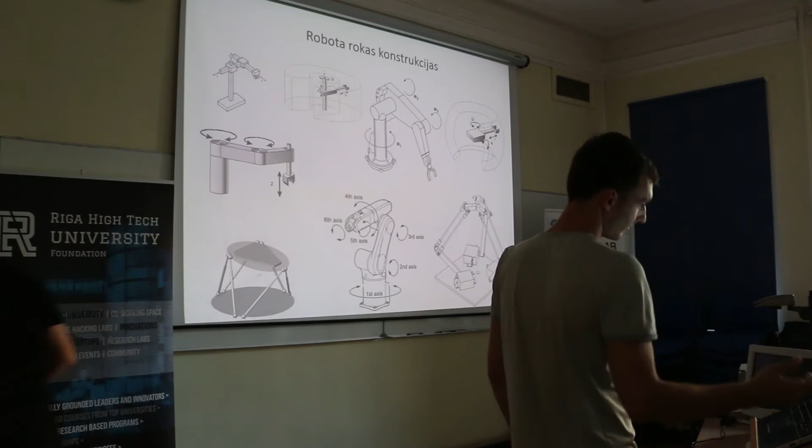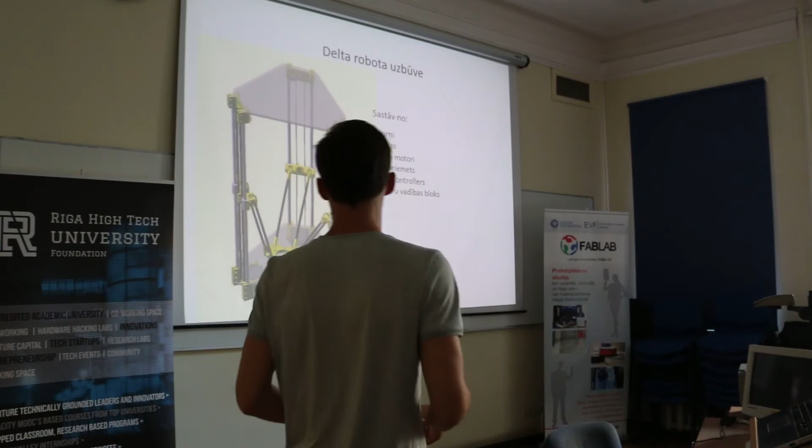Basically my work is a 3D printer, but I built only the moving parts, so I can arrange that with my school, so it could be a robot arm. Yeah, it's part of my master's. So I built a Delta robot printer. This is the picture where you can see 3 towers, 3 arms, which connect in the middle, where you can put your element, extruder. And under all of that, there is a microcontroller and a motor.

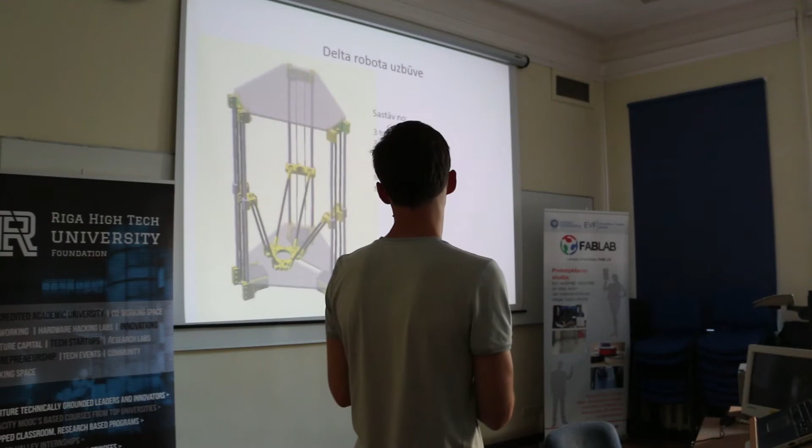Can you tell exactly what this thing does in this 3D printer? How it works? For example, what is an actuator or what is a microcontroller? It's gonna be long. I want to keep it as short as possible. If someone has prepared a question, then you can go and talk to Christos. Yes, there is a wooden tower, it's made by me, and you can ask questions later if you want. Okay, I will do that.

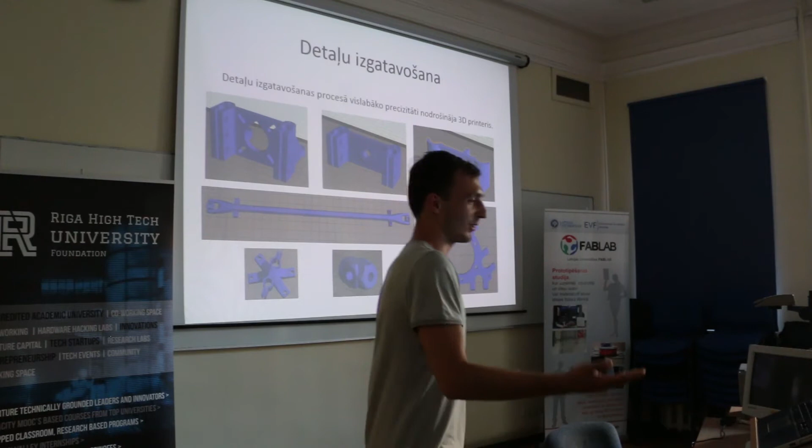For my old teachers, it was a very good presentation, but I think for you it's not so interesting because there are all the parts. You designed it on your own, or is it downloaded? Downloaded. Everything is for free. If you look, you can find it. And there is how all that works. I think it's too complex for me right now to talk about it in English. But if you want, we can talk in that room.

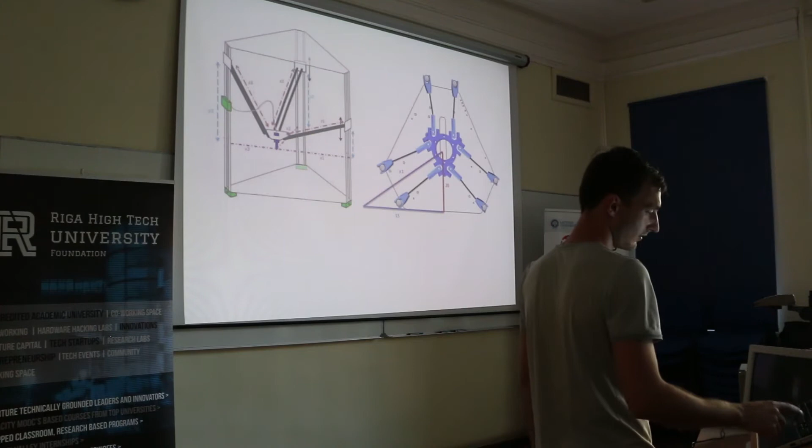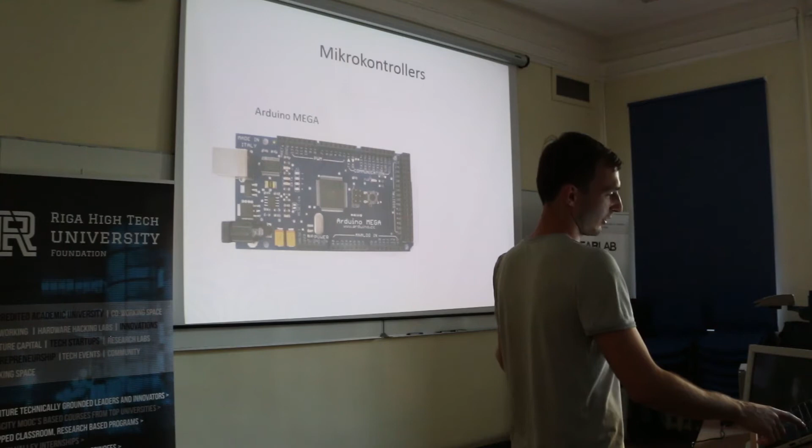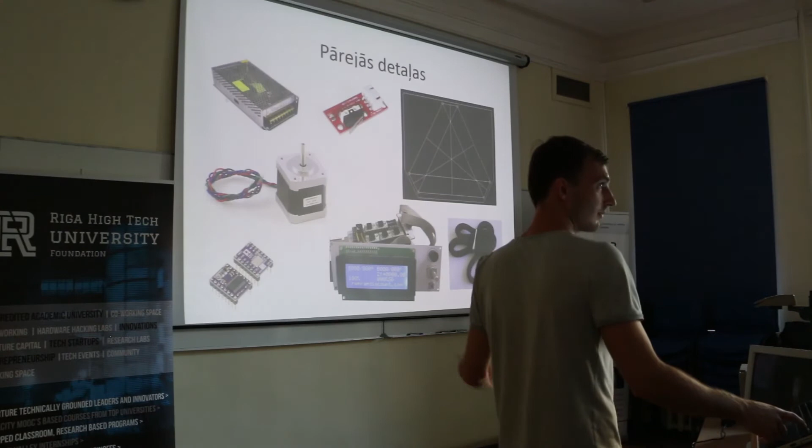Microcontroller: Arduino Mega, the biggest, strongest microcontroller from Arduino. Then there is a RAMPS, which is basically designed for RepRap, and only the software is changed to work with the 3 towers. So there is a little difference between RepRap and Delta robot. So, there are all the parts. Any questions about those? What is it? No, I don't know. We can talk about it there.

Where did you make those parts? In the Fab Lab, yeah. And before that, I didn't know that in Latvia there is a 3D printer master. I didn't know about that, and then Krish told me, and it was a big surprise, because they use the same mechanical construction as I was trying to do.

So, you said the word RepRap. What does it mean? Yes, it's a printer. I don't know what those acronyms mean, but RepRap means a machine that is capable of replicating itself. And that's the goal of the RepRap project, building machines that can reproduce themselves, theoretically. Practically it means right now that we can print out plastic parts on the printer and assemble a new printer. And of course it needs some motors like stepper motors. That's the meaning of the word RepRap.

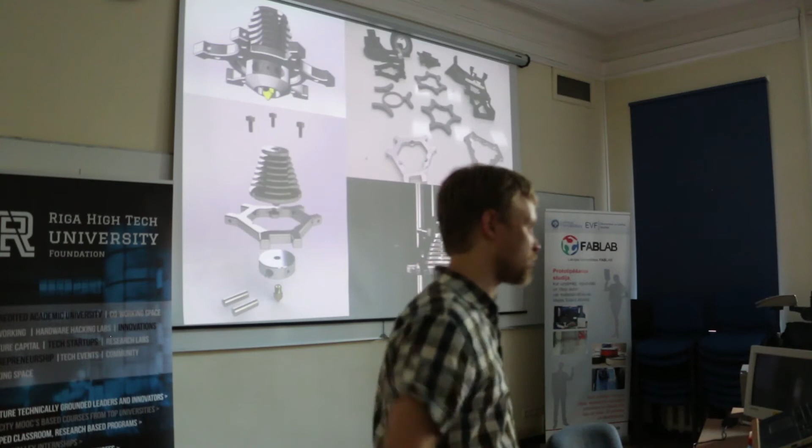And then we started dreaming about the next version of our product and prototyping that. And here we go. For example, printhead. We are not building Chinese components and putting them together. We want to build a beautiful machine and an original printer, so a lot of it is built in Latvia, made in Latvia. Over here, some companies help us with metalworking and electronics, and now also with software.

So in this case, 3D printing helps us to prototype the metal parts in the first place, and they are printed on our printers. This is ABS plastic, and it allows the parts to be tested. We can go through lots of iterations. We make some models, change it, print it out, and some components of the printers have been through 20 iterations, maybe more, till we find one that suits us, and we can test them out. And the parts are sturdy enough. They can be used also for limited volume production.

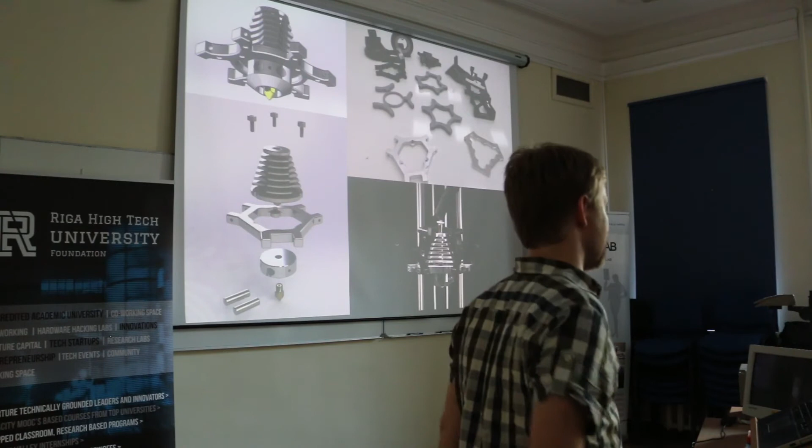And that's essentially the key to getting the product to work as it should, because if you have it only in 3D, you never know how the material works out in real life. So the essence of prototyping is that you can test it out, show other stakeholders, and basically touch a new version in very short time and very, very cheaply. Basically at the cost of the plastic filament, if you have the printer and the ability to model it in some 3D software. So that's the final product for the previous edition. Now it's again undergoing prototyping, and so it just iterates forward.

Here is the result of the previous prototyping work in an exhibition, and again prototyping a different component of the printer. That's the linear guide system that you also saw in the previous presentation called Delta, but we started out with metal rods, calibrated rods from a very good supplier. And found out experimentally that all the components have to be of very, very high tolerances mechanically. So we have now moved on to a linear guide system that gives better precision, but these parts are how we get there. There's lots of experimentation, lots of back and forth, lots of consultations with different experts.

And not all of the prototyping happens on 3D printing, and as you see in the bottom pictures, we have done some prototyping on aluminum as well. So that's just not the way to do it. It's very expensive to have these CNC parts cut, but sometimes you just don't have the time to print something, or your filament has run out, so we did a bit of that as well.

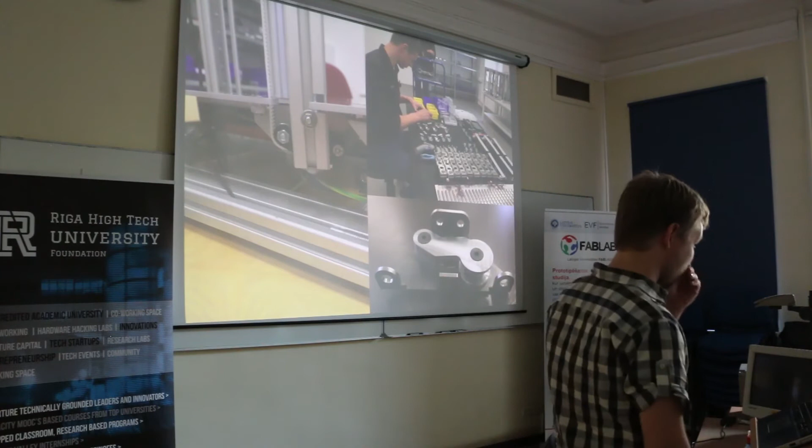And also, again, here you see some part that's printed out, used in a real life situation, the tensioner of the belt, just to check how it works before it's sent to CNC machining, and that's the final beautiful part, and that goes into our production.

So this is a real life story of how the prototyping process looks. Just one printer for a person is never enough. It's not that fast yet, so you can churn out far more models than you can print on one printer. So it's nice to have a number of them, and we are of course a bit privileged in that regard, but still.

And the next story, I will maybe ask Juris to tell it. Another product that's also gone through this prototyping and now is being shown to big investment stakeholders to evaluate it. And so, Juris.

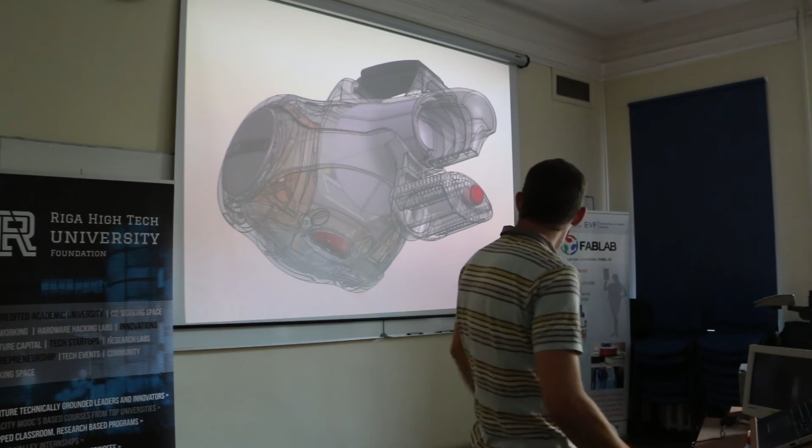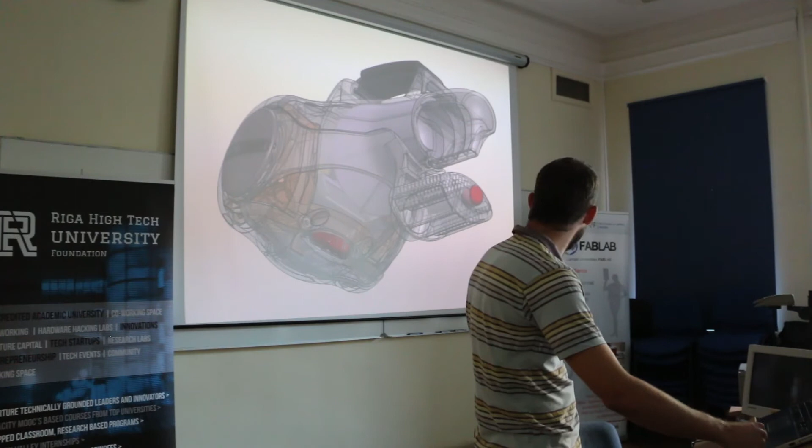And then we had a crisis, and I had time to learn CAD, to search what we have not in the Baltics, and we have not till this moment infrastructure for making things and infrastructure for thinking about making things. That is very bad, that we're talking about innovations, about how to learn to swim, but we have no pool, we have no idea how to go to the ocean.

And here is printed parts. This is in my home. I bought some MakerBot. I really bought what is the most common apparatus in the world. I have no money to pay 2,000 euros to Austria, 2,000 euros to, and I bought a MakerBot in my home, and then it starts, and then I understood that no one will stop me if I get some machine who can make everything what I need, what I want. Of course, I don't make jewelry or bumpers for a machine, but for my new hair dryer, it's quite suitable, and I can stick it together if it's necessary.

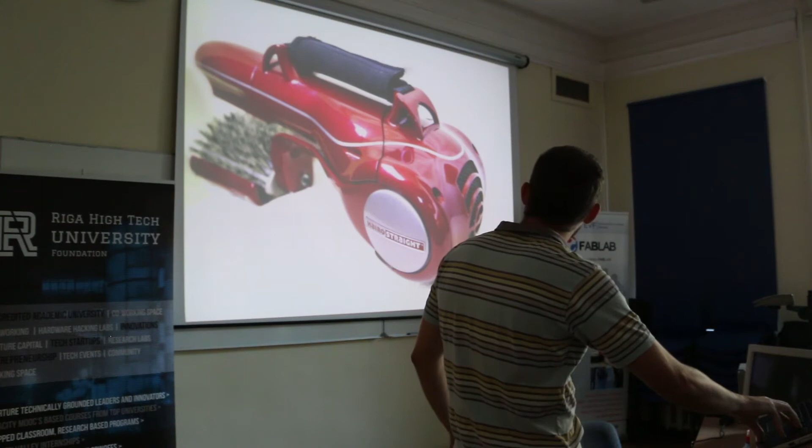And here is further. I don't know how many prototypes I made, but if you go ask for money, givers are big children. They want to touch, to see how it looks in the stock and how it works and what my wife thinks about that in that colored lamp or something like that. And what I want to say, there is no problem to get our ideas into real products. Go to Kickstarter, Indiegogo, go to Business Angels, not in Latvia, somewhere else where the money is, and just cry about that we need it.

It's very, very important that for this swimming, we have a pool, and then we go to the ocean, because we have, I think, in Latvia many people who have very great ideas, only with the communication and just maybe some Google. Huh? We need a forum.

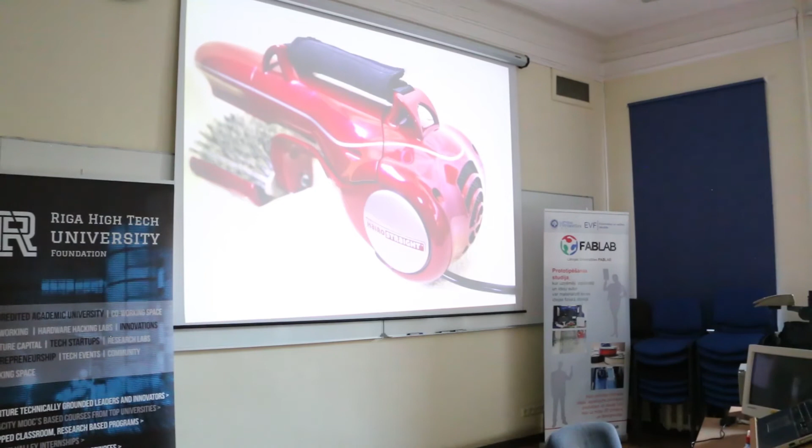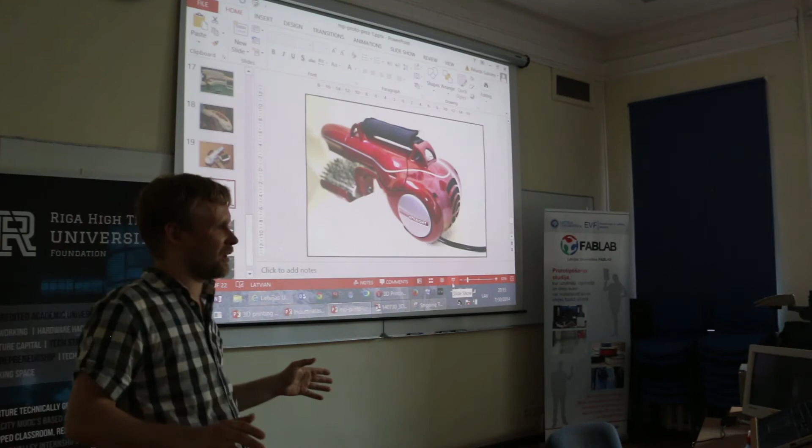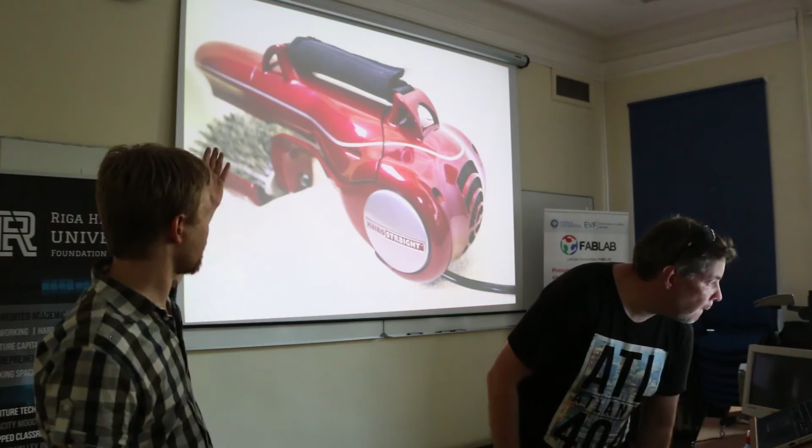Any questions? Let me come just very short back to this picture. And this is also 3D printed. And the thing about 3D printing that everybody tends to overlook or doesn't want to hear is that the parts are just parts, plastic parts that need some post-processing. And this is printed on the same cheap printer, just later on post-processed. Painted, polished. So you can have prototypes of that quality on desktop printers. You just need to invest some time in it and some willingness to go there.

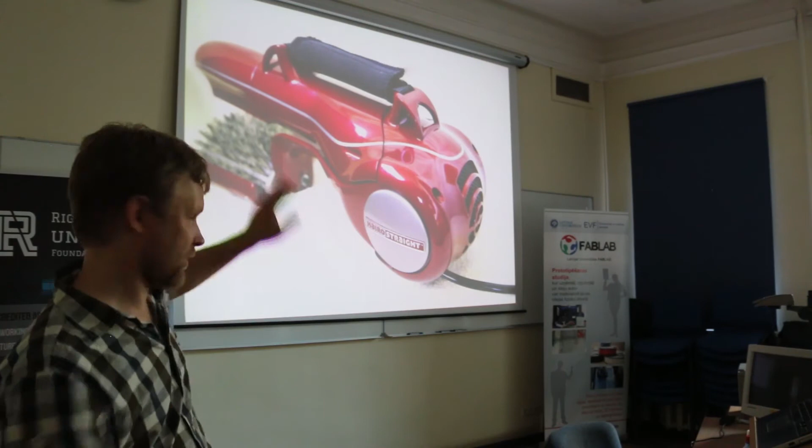It's entirely one of a kind. It's working. It's stuffed with electronics, but it could be made on a $300 RepRap, probably, without the finishing, of course, but the parts. So this is really the enabling technology or the disruptive thing, that investing some of your own cash or time, you can get to a level of prototyping that has not been available up until now. And that's the enabling that these cheap 3D printers give people. So, any questions?

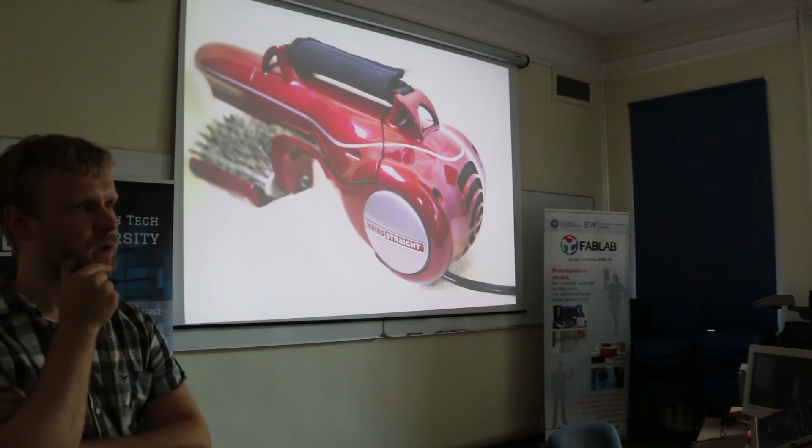Can you say something more about finishing techniques you use? You can later on go into specifics with Yuri, but this is, I think, polished, sanded and painted, and after that polished again and so. Maybe there is some very low technology when you use acetone vapors. Exactly. This is ABS plastic. The same industrial plastic it's molded of afterwards, so it's also behaving in the same way.

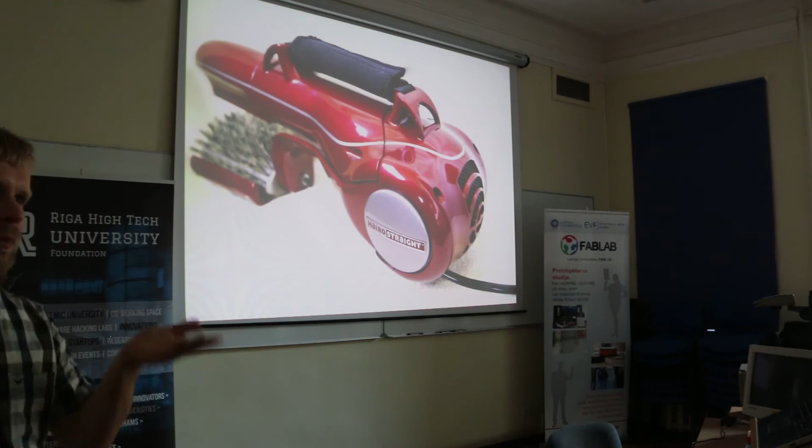In a vaporizer or some device where you vaporize, you cannot control it very well. Yes, wow, it's too much. Yes, vaporize it, and it becomes hard to control. If you make it polished by some sandpaper or some Dremel, then after that you can paint it like a car. Sometimes molded parts are also painted, as you see, because the depth of the surface depends very much on this. It's better to paint if you want the ink or something to stick better.

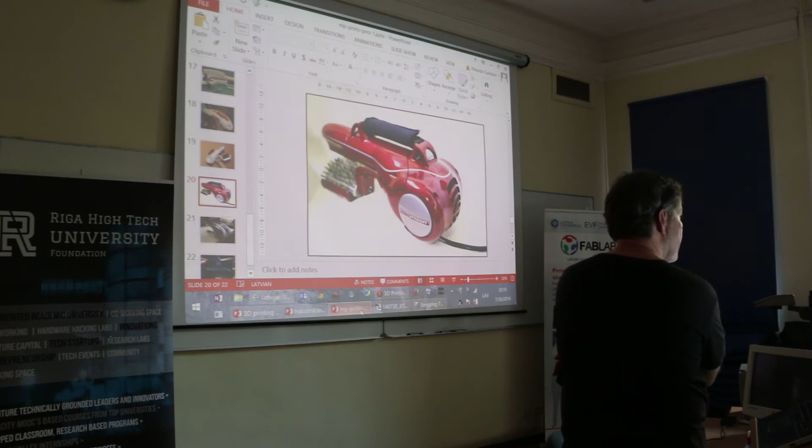Question: can you use any spatula putty for polishing? Spatula? Yes. It's possible. That's the spatula putty for cars. Yes, it sticks very well to plastic, and ABS is ABS. But we also have another method, grinding with this filament in a Dremel. Just grind it with the big object inside. And there is a method just to make it without this waiting process.

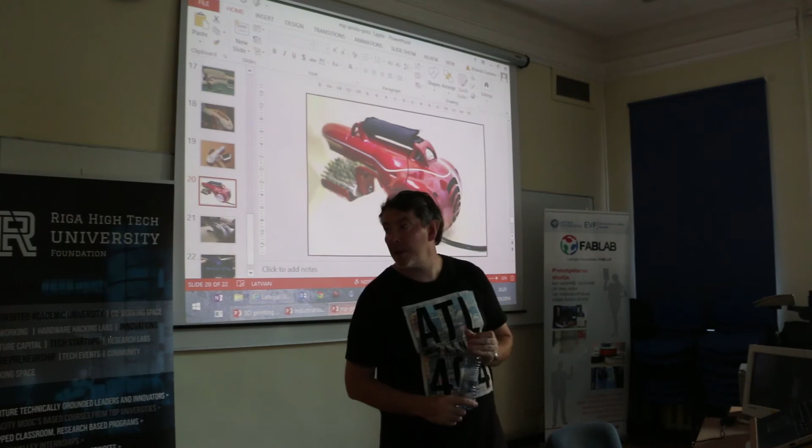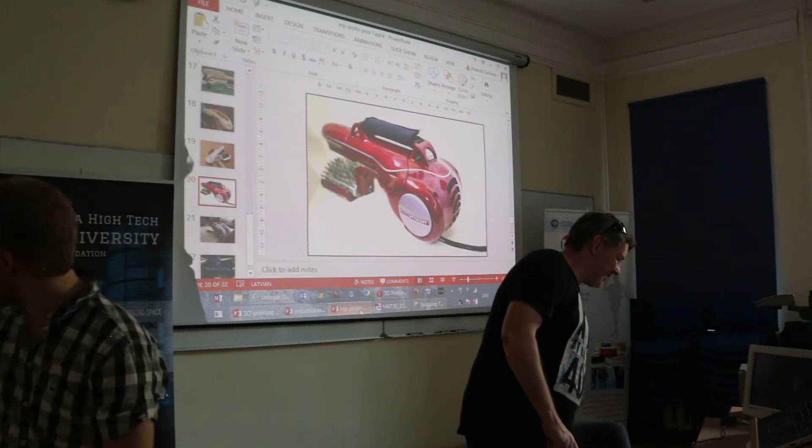Probably a question from the UK. Speaking about the Mass Portal printer, why should I buy it instead of MakerBot? Why should I choose Mass Portal instead of something else? We were not invited here to pitch our product, but you can go back to that office and check it out for yourself. Generally, our printer is supported in Latvia with local spare parts, service manuals in local languages and stuff like that. We are here. You don't have to wait for spare parts being sent over from somewhere. Same day.

You are going to have problems with any printer, including ours, the first day, because you need to learn the product a little bit. But if you don't call us the first day, you probably won't call us the day after, and then it's going on. But still, it's nice to have the support available.

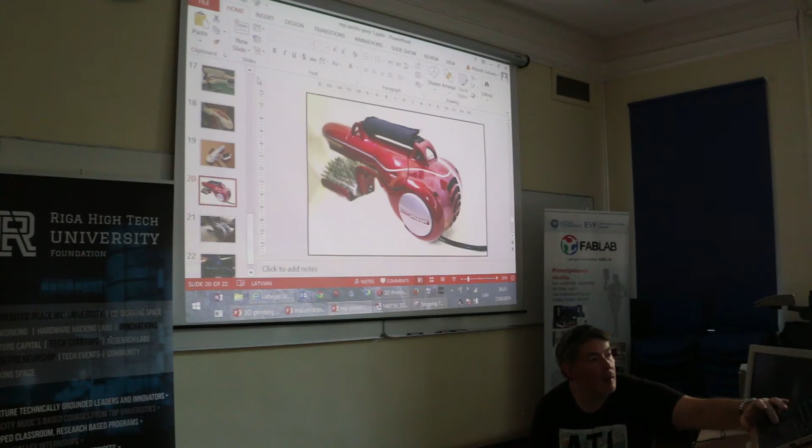Janis, compare our Delta with the MakerBot system. Generally, Delta printers compared to the MakerBot style conventional printers have less vibration and less noise. And you can just run them faster because they don't have this vibration. They are quite a bit faster than that system and quieter. Also, our printer can print with materials like ABS, PET, PLA, nylon, which MakerBot, for example, can't.

So in terms of specifics, it's very open. Ours is proprietary hardware, it's our own design, but it's open. You can run it with different software and different settings and basically experiment with it. That's not possible with a lot of the brand name printers. They are closed down.

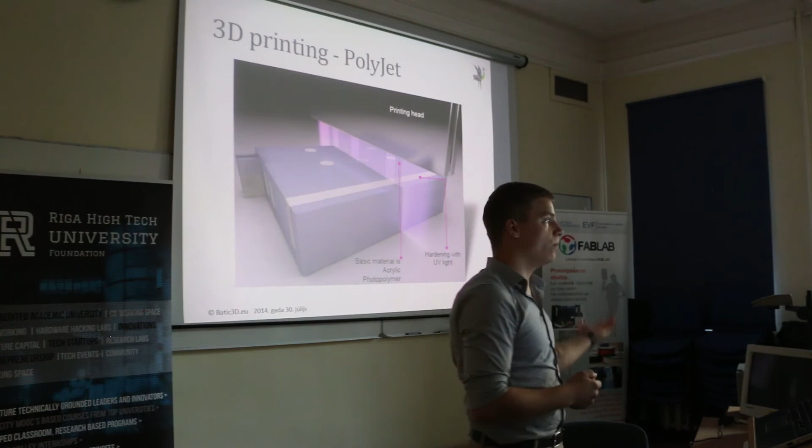It's not as accurate as EnvisionTEC or some other small-scale jewelry printers, but we can achieve a layer thickness of 16 microns while still printing fast, which is a difference: when you lower the layer thickness on a desktop printer, it's going to get much slower. This is the fastest technology for accurate and detailed 3D printing.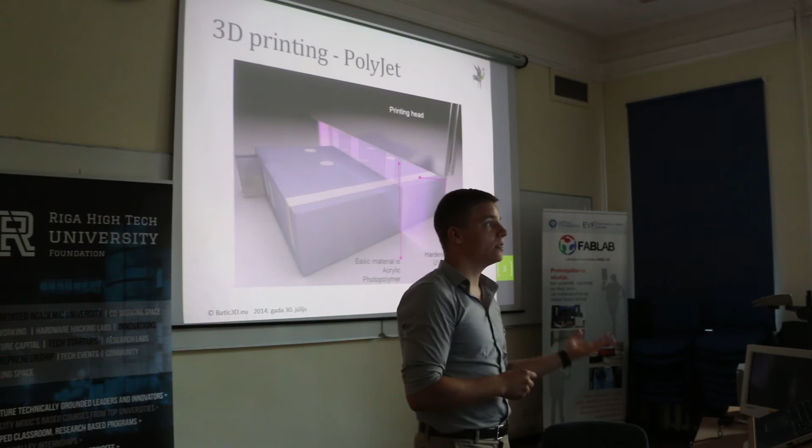It prints with 2 materials at the same time, and this is the big difference between desktops and industrial printers. We use support material that's different from the model material. The support material is washed away after the printout is done, and the model material stays to make the part. Support material is needed for all the overhangs, negative angles, and holes or cavities. For PolyJet, you can wash it out with water.

For FDM or FFF type machines like Mass Portal, in industrial printing they use soluble supports that actually dissolve away after you put them in a special solution.

So I'll quickly run through the technologies and then we'll touch on a couple of applications. This is the same printer that we have in our office. The dimensions are there. We have 7 different materials. They are more or less the same in terms of material qualities, with different shades, including transparent. The next level PolyJet, as you can see, prints typically 16 to 32 microns.

Then there's the next level machine that was just announced this year by Stratasys. It can print with at least 3 different materials, including transparent, color, and flexible materials, and you can mix them in different proportions in the same part. That means you can print out the prototype of a calculator, for example, and have the buttons to press down already out of the printer. You just wash it off, put in the electronics and it works right away.

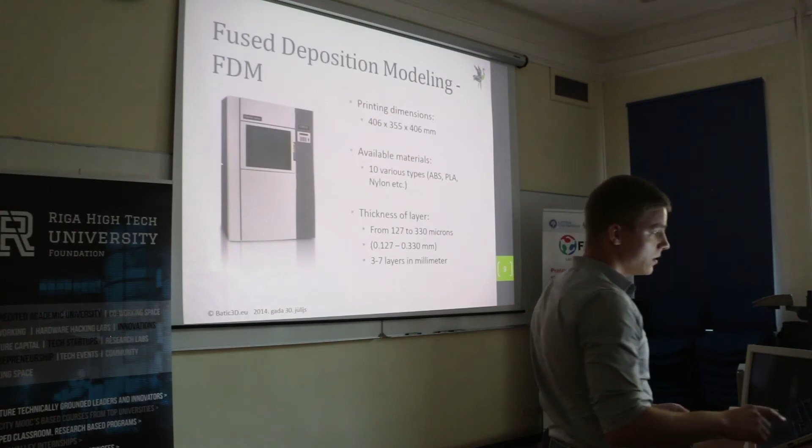I'm not sure if this is going to work. I had some videos. Fused deposition modeling or fused filament fabrication, or I forgot how it was. Maybe you can correct me.

Industrial FDM machines are extrusion type machines, much like these. There are several differences though. These machines work with industrial materials, and I'll talk about that later. These materials, including ABS, are very much like the materials you can use in desktop printers. But then we have high performance materials like ULTEM, PPSF, and nylon that don't usually work on simple machines.

They heat up the environment where you print, and that makes a big difference when you want consistency in your printouts, when you really need the first and the 100th part to look the same. They heat up the environment almost to the degree where the material is fusing, and then when you fuse it, it cools down to a temperature where it's solid again, thus making printing more stable and more reliable.

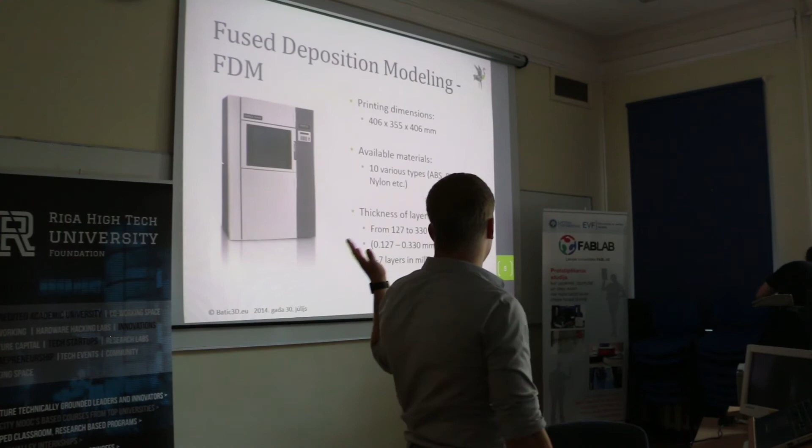The layer thicknesses vary. FDM can go below 120 microns, but usually it's printed in this layer thickness just to get the product out of the machine faster. There's also selective laser sintering. You just melt the layer, you lower the platform, put another layer of powder on it, again melt it, and repeat the process. The unmelted powder serves as the support material, and the melted powder makes up the part. The layer thicknesses vary, but it usually runs in the 120 micron scale per layer.

And last but not least, I heard there were several questions about size. Some of the biggest machines made in the world, even 1 by 3 meters, are SLA machines that can create huge, enormous parts, and they work with acrylic plastics, much like PolyJet. You solidify them with the laser, the material reacts to light, and thus you build up the part within the liquid. There are only a couple of machines that are that huge, but mostly you have smaller machines, including machines like VisionTech that work with SLA technology.

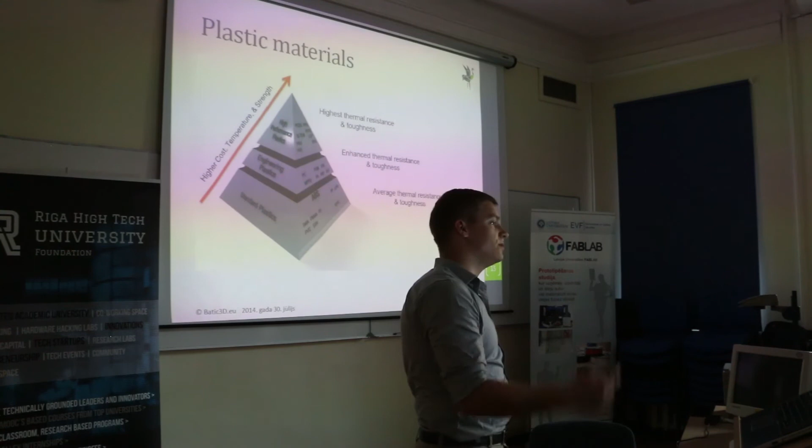So as you can see, the FDM and the PolyJet sides make a big difference there. And now with the materials. You could divide all the materials into 3 groups. We have ABS around here, which is the standard plastic. PLA is definitely below ABS plastic. Then we have engineering plastics like polycarbonate. And then we have high performance ones like Ultem and PEEK. Those are plastics that are usually sent into space. They're very, very solid, even more solid than aluminium. So they can be used in very special cases, and Stratasys machines can print them.

A slightly different comparison lets you see where our materials are. We're mostly below ABS or at the same level. Materials that we use in our printer are not meant to be as strong or as durable as ABS, but they are more accurate. So if you need very specific and very precise models, that's how you can make them. You can make moving models right out of the printer. You can have moving hinges. You can have fit capabilities. And applications are endless. You can basically use those printers anywhere you can imagine.

As for cases we have worked on, as most of you probably know or have heard about AirDog, we helped them print a lot of prototypes. We printed in PolyJet their wrist watches and the air leashes, where they had rigid and elastic materials in the same component. We printed them in ABS, in polycarbonate, and in Ultem as well. They tried to test out the harder plastics and how they would behave in the air and on the model. At one point we had 5 printers printing for them. We have 1 printer in Riga, but we have partners that print in Lithuania and Poland, and we had 5 printers simultaneously printing for almost 2 days to finish their order.

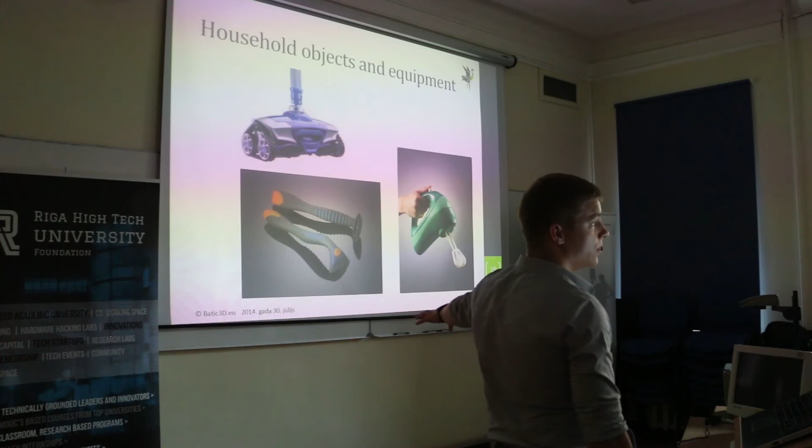Some other electronics use cases. The new printer, this is not colored, this is printed right out with a color printer. So you get parts like this that are out of the printer, they're not post-processed. Medicine, obviously, even some crazier cases with printing biocells and printing implants for jaws and knees and whatever else. Prosthetics, printed on high-end SLS printers.

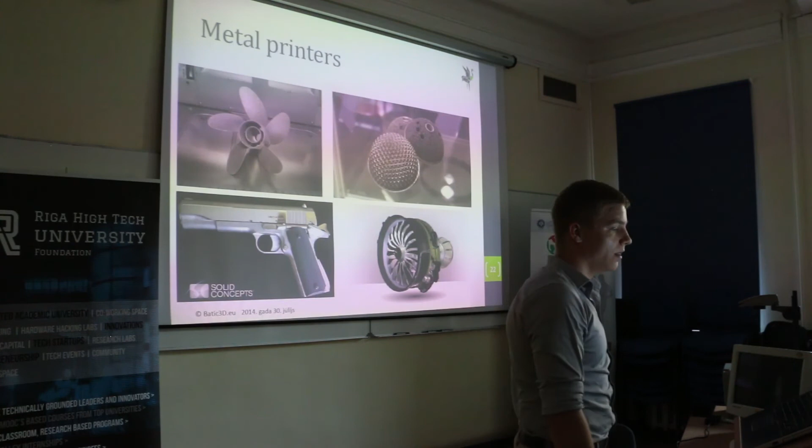And then we have metal printers that actually print metal parts from titanium, stainless steel. And NASA tried out printing one of their shuttle engines. It actually worked. There are Arcam-made knee and hip implants. Arcam is a company from Sweden that does one of the best jobs in metal printing.

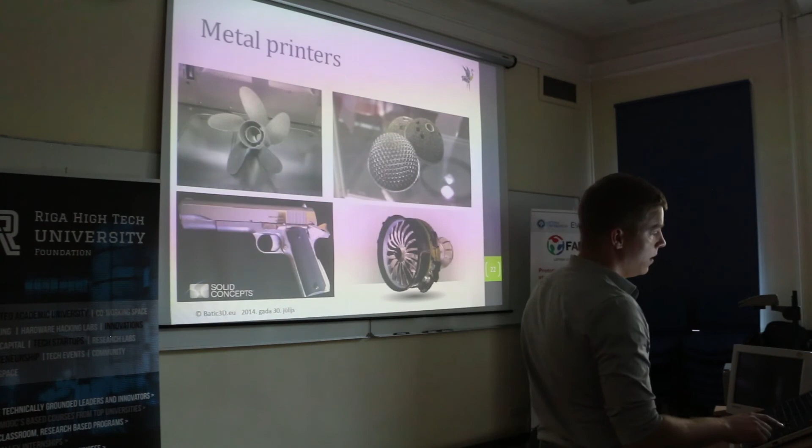And as I told you already, we are the official reseller of the Stratasys printer line. There are more than 20 printers on the PolyJet side and on the FDM side together. We are a service provider. We print for anybody who needs a 3D printing service. We've been printing injection molds, we've been printing very accurate parts, and we print casings and stuff like that.

And we are a one-stop shop as well. If you need something, we will find a solution. We will send you maybe to Fab Lab, or we will send you to these guys to buy a printer if your need is very specific and small scale. If you need something bigger, we will try and help you with that and print it for you. I could actually show you a couple of printouts that we have done in the last few weeks.

This is a ball prototype. It's not clean, so when you print on one side, you will get the support material. When you clean it, it looks like this. It was for one client. Then there's another ball prototype. This is done in FDM because there was not that much detail in it. These are very small figures, but I guess these guys can tell you more about that. This is not the best quality stuff.

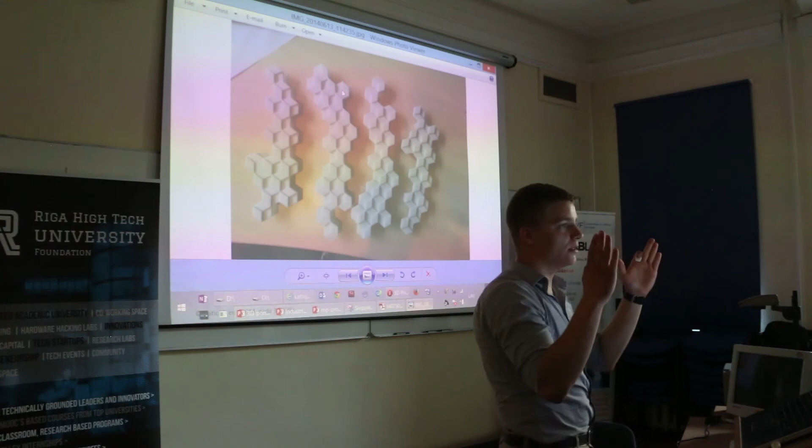That's true. These are some ornaments for production. These are actually handles for furniture. One designer in Latvia did them. They're quite large. They're almost this large. So smaller printers cannot make them. And these are made in polycarbonate, so more durable.

What's the price? The price varies very much, obviously. I will get back to the slide where we discuss the price and I'll tell you. I will name numbers as well if you want. So these are aerial prototypes made in the Ultem plastics. These are some PolyJet prototypes made in acrylic plastic.

These are the combo parts which are made with the transparent rigid plastic and with elastic black plastic, and all together they make these remotes. You just put in the electronics and the buttons work right away. And they are printed at one time, so you don't have any assembly.

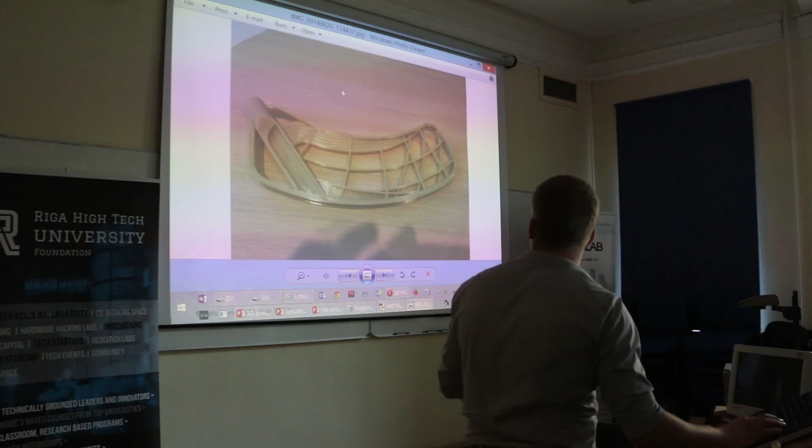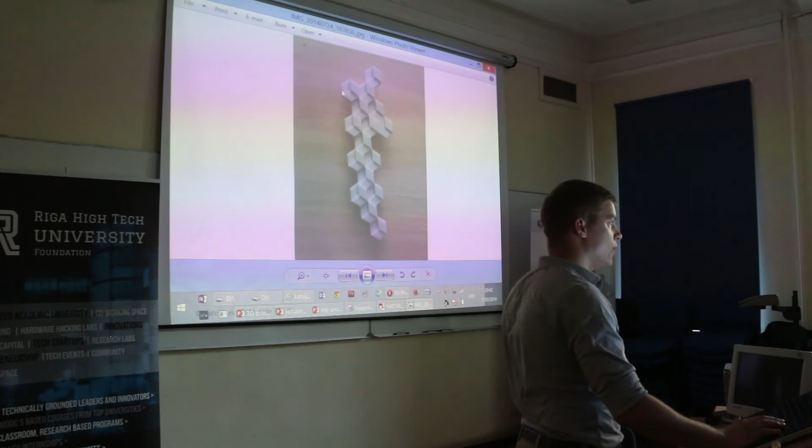Some more interesting cases, like here, Raspberry Pi cases, injection molds for silicone injection molding. And here we can actually achieve very, very high accuracy, which means that you can inject in these molds right away. This is a very specific case for small figures, and there's silicone being injected in them. Some casing examples, and again some small things. And I'll go back to here.

So how does the price come together? First, it's technology. So there's FDM, there's SLS, and there's PolyJet. In PolyJet, we price every gram that we use plus the time of printing. In FDM, we price every cubic centimeter of material plus the time of printing. And in SLS, we price every layer. So for example, if you would make one of this or 100 of this, if it fits in the platform, it's almost the same price, because you price for the layer when you build up.

So typically the prices for FDM are from 3 to 4 euros per cubic centimeter, and if you translate the PolyJet prices, they also tend to be in that range from 3, even sometimes to 6 euros per cubic centimeter, because there can be specific geometries that ask for a lot of support material or for very high detail and very high height of the part. That means that it's going to take much longer, and if we especially print in a clear plastic with a thin layer thickness, that would make up quite a big sum for just the prototype.